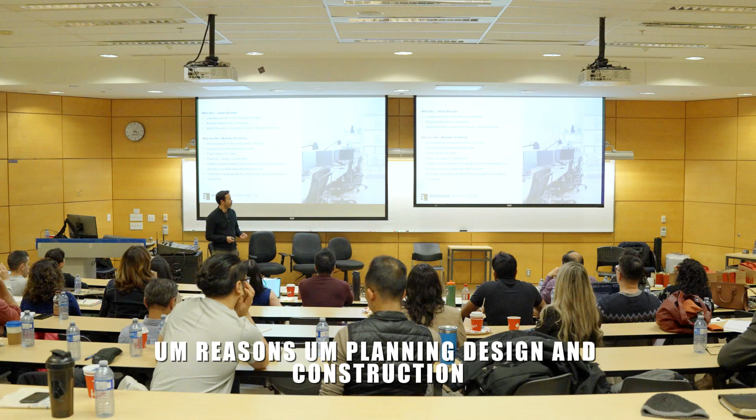A lot of times on these small projects, they aren't at the scale where you're able to hire a planner and all these different consultants. So by getting into these granular scale projects, we have familiarity with the front end, with the planning work, municipal approvals and things like that. Personally, I've had my own construction experience building my own houses, and just familiarity with real conditions on site, which lends well to working with some builders, some of whom are in the room. We can speak the same language.

So that's briefly about us. We're based in Leslieville, just on the east side of Toronto. Contrary to what Andre said, we do all sorts of buildings. So if you want really nice houses or a diversity of building types, we do kind of all sorts to keep it interesting.

I show this - this was an international competition we won last year in the beaches for a winter station, just an art installation. So even though these types of projects are really practical, functional, driven by math and making sense and making money, there's that creative side that I think all architects have, and that really lends well to problem solving in these projects, and it's not something to be overlooked.

This is just a brief history. Where's the clock, by the way? Okay.

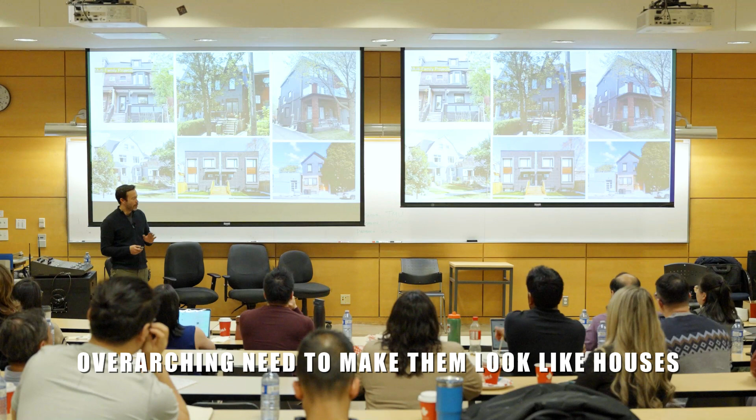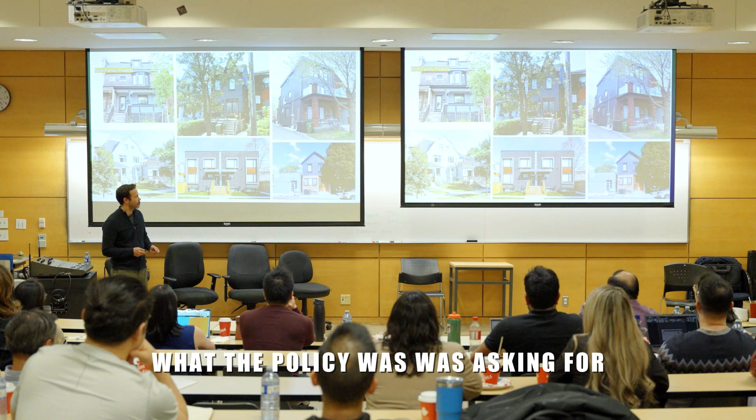Multi-family projects, 10 years ago, there was this overarching need to make them look like houses and really just integrate with what a single family house might look like, or a semi-detached. These are some earlier examples of something that might look like a house in the neighborhood, and that was kind of important to fit the mold in terms of what the policy was asking for. So we made multis that look like that.

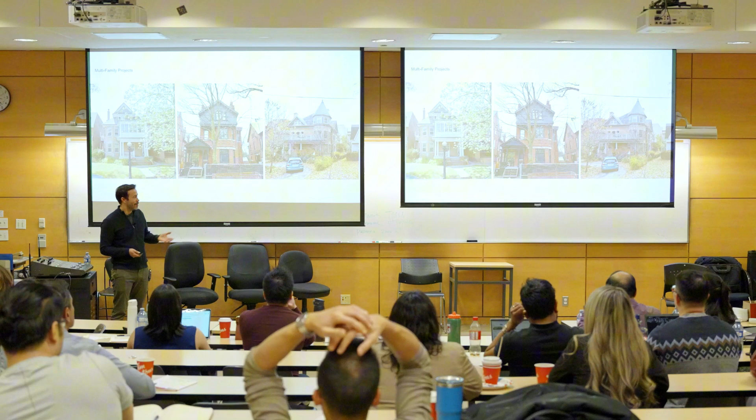These are examples of some bigger properties, luxurious properties - there's nothing to say you couldn't introduce a secondary suite in a property like this and have even part of a basement be an income property, and still have a really nice luxurious home to live in.

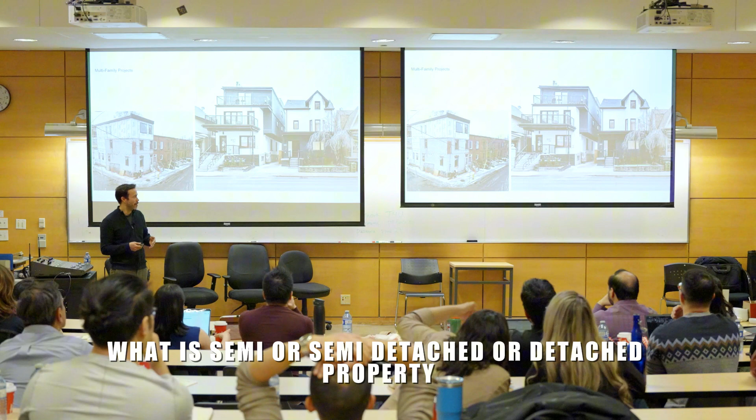And then as we move along, there's just less of a need to fit the mold of what a semi-detached or detached property in terms of a house looks like. So we're starting to see policies change, and just limitations on building height and length and appearance change.

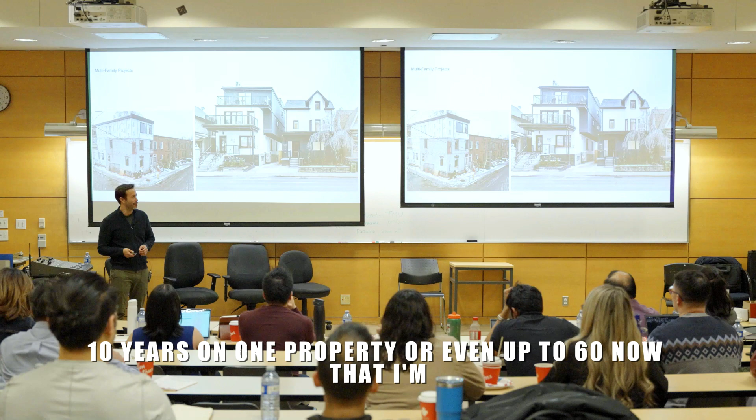So there's just this opportunity now for this new mix of housing typologies in Toronto. Policies are more inclusive of multi-unit. Jaden was saying a term, 'as of right,' in relation to a fourplex, and that is the case kind of across the city of Toronto, and there's even more permissions in certain areas in Toronto for, say, 10 units on one property, or even up to 60 now that I'm sure people are starting to acclimate to.

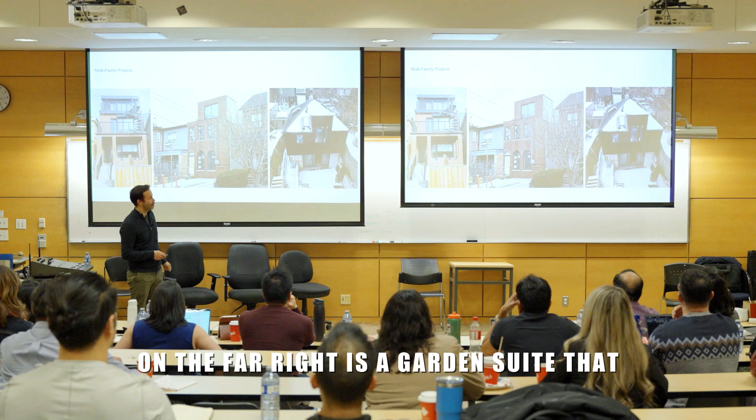And just a few more examples here - on the far right is a garden suite that we're interested to see getting built in the 4+1 model.

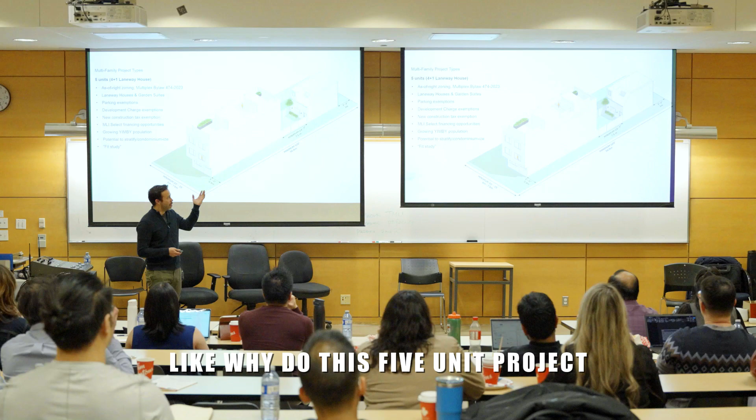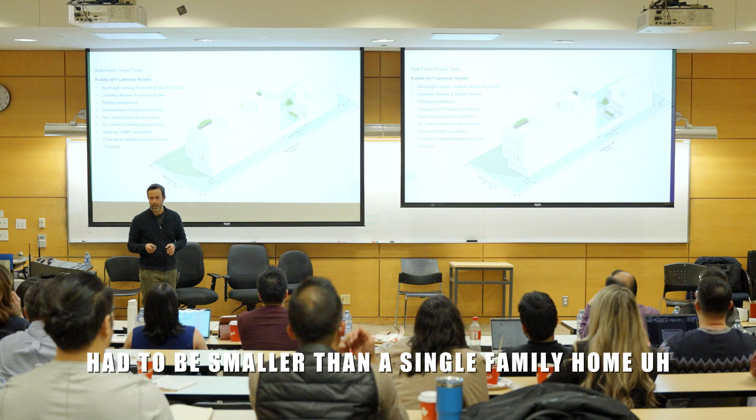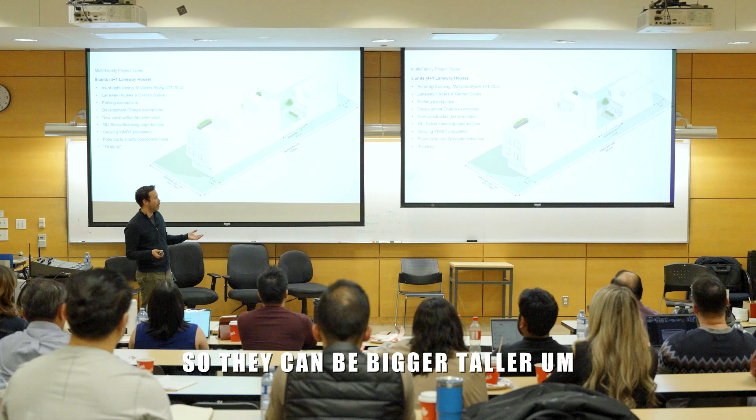So this is a diagram of why now, why do this 5-unit project. A lot of the financing folks earlier have spoken to why it makes sense, but from a design perspective, as of right zoning, in 2023 there was a new bylaw introduced. Previously, even a duplex, triplex, or fourplex had to be smaller than a single family home on a same size lot in an area. This bylaw came out and basically said we're actually encouraging these types of projects now so they can be bigger, taller, increasing flexibility for accommodating smaller units on a smaller lot.

Laneway houses and garden suites, everyone's familiar with. Parking exemptions used to be a sticking point for doing say 4 units on a lot. There was a requirement to have 4 parking spaces on the lot, equivalent to the number of units. Those minimums became maximums now.

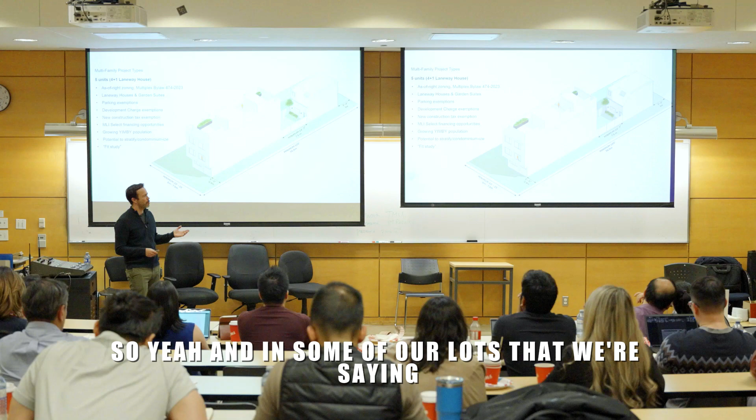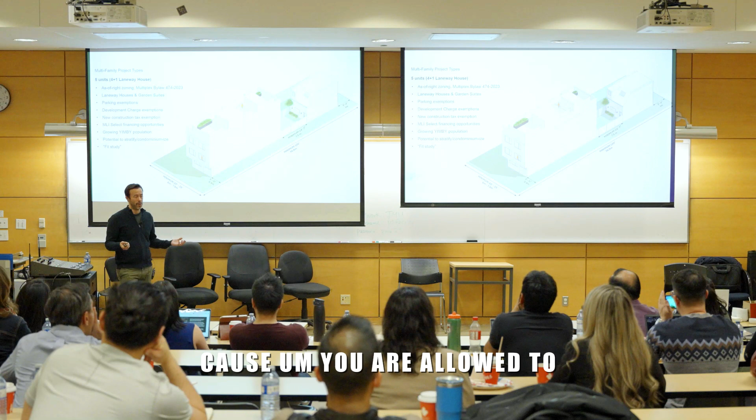Across Toronto now, it's not so much a question of needing to meet requirements, but like Jaden was saying, if you are close to transit and things like that, great. If you're not, it's more a question of whether you, the developer or builder, want to provide parking on the lot. You're allowed to, and in some areas across the city it makes sense to include them. On some of our wider, bigger lots that aren't quite downtown, we're able to fit 3 surface parking spaces at the back of the property to suit the area.

Just a question - what's your experience in being able to get more than 1 parking space on a lot being renovated from a single family home that has 1 space? Have you been able to get more than 1 from the city?

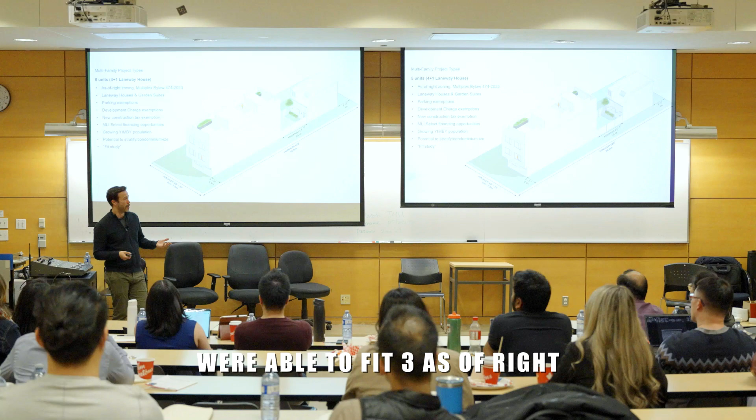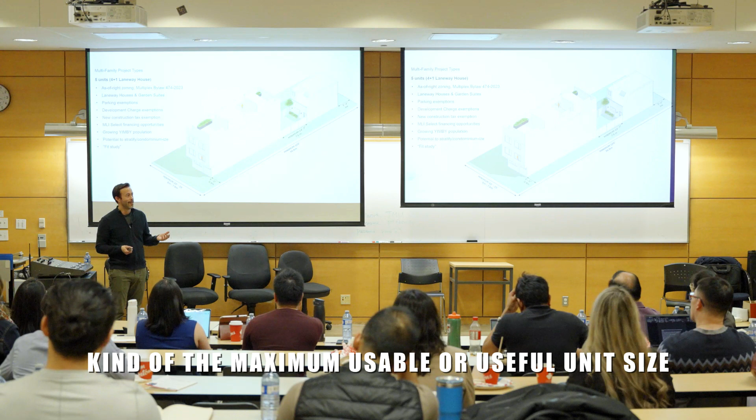In a lot of the downtown locations, we're kind of limited to 1 or 0, though with a minor variance you can get 1. On bigger lots with 50-foot frontages, we're able to fit 3 as of right in a lot of scenarios, and that's helpful. On those bigger lots, the new bylaw makes it so permissive that it's no longer a question of let's build as much as we can - it's let's not overbuild, because the pro forma suggests a 3-bedroom, 2-bathroom unit is about the maximum usable size. An extra den or anything wouldn't yield extra rent, so let's cut construction costs and keep it at the right scale.

I can jump into more questions at the end.

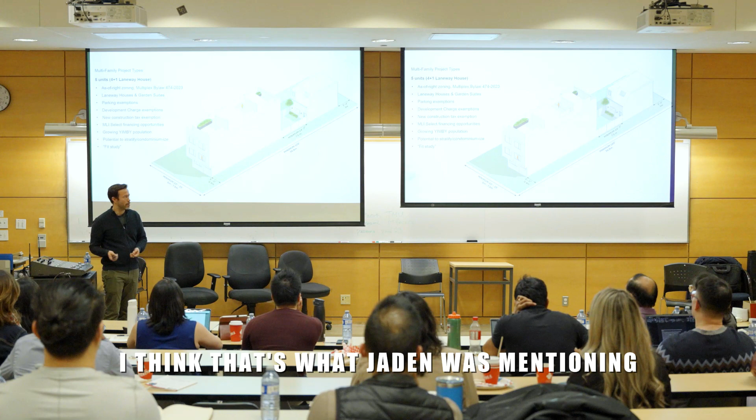Development charge exemptions - up to 4 units on any property is exempt. I think that's what Jaden was mentioning in the previous presentation.

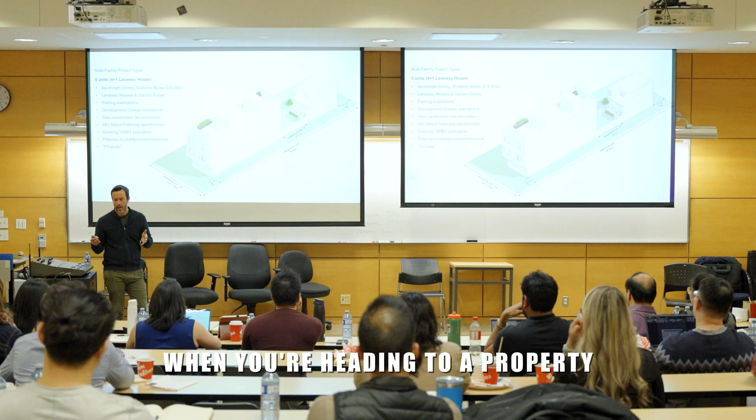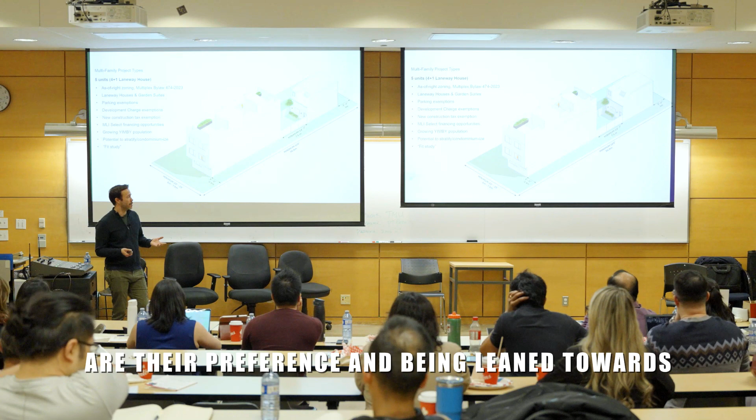It's about $250,000 of development charges exempt for that project type. New construction tax exemption - we used to have to work with existing structures, and there's still some reasons to, for grandfathered setback conditions when adding to a property if you want to keep setbacks. But now new construction for rental is exempt from additional taxes, so we're seeing more new build, high performing buildings being preferred instead of working through construction difficulties with old foundation walls.

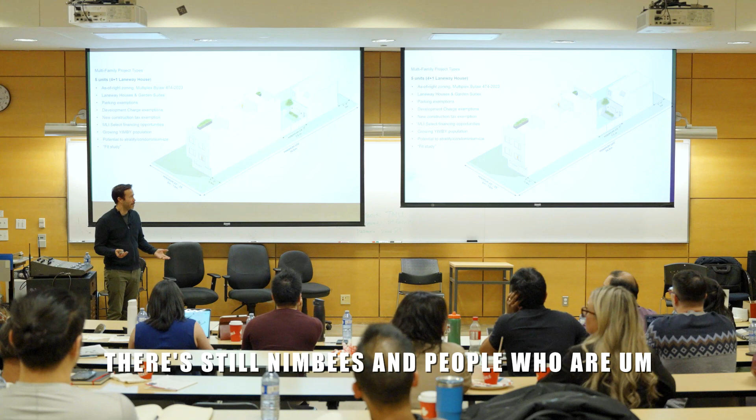Growing YIMBY population - yes, in my backyard, there's still NIMBYs and people against multi-unit properties, but we're seeing a more balanced population now, with people realizing we need more housing, especially with high-rise slowdowns or the lack of a mix of unit types in Toronto.

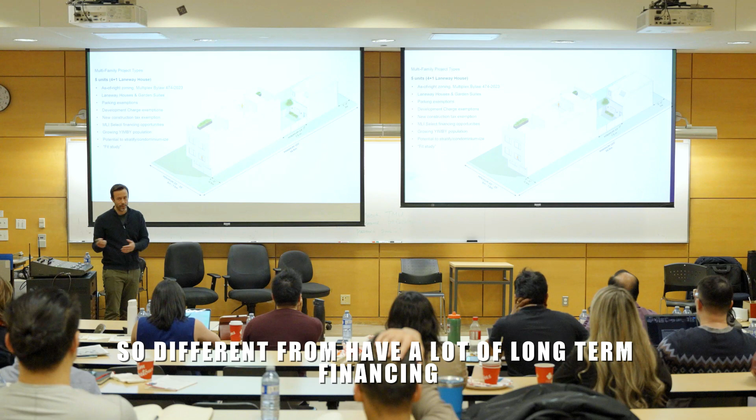Potential to stratify, condominiumize. Some of our projects are going that route - different from MLI long-term financing, they're looking to condominiumize and then sell.

A fit study is something I came up with Andre a while ago. This is when you're looking at a lot and trying to assess it - is it the ideal lot? There's a whole bunch of effort that goes into that in terms of location, but we can be part of it in identifying red flags, whether it be existing conditions of neighboring structures or trees in the area, which adds risk to the project - it's not necessarily a definite you can start building day one, but there are factors to consider.

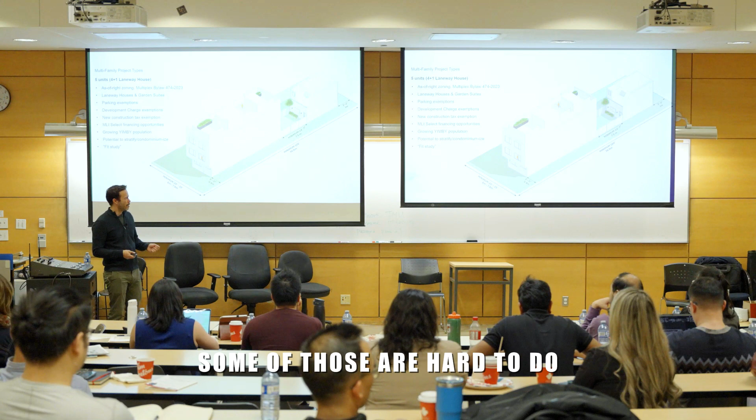Some of those relate to this diagram - we're showing a 0.9 meter side yard setback. Not all units can always enter off the front at the street, so there's a need to access some units from the back of the property, which can include the laneway suite as well.

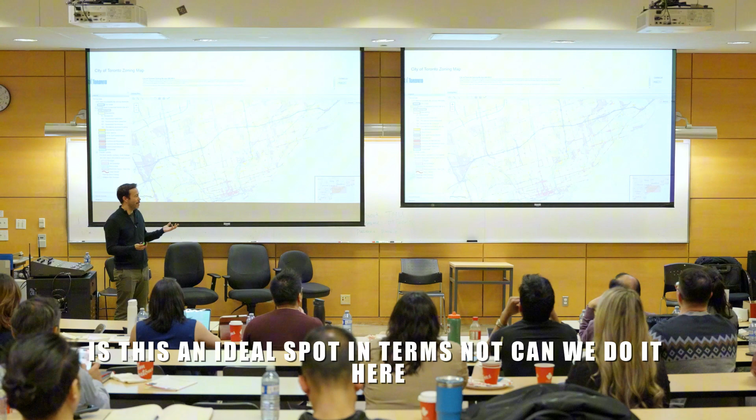This map, if you haven't seen it, is Toronto's zoning map. It's really just opening the door on multiplexes at the 4+1 scale. Everything that's yellow can be a 4+1 in terms of where it's located across the city, so there's a lot of land to cover. It's really that fit study I was mentioning — is this an ideal spot, not just can we do it here.

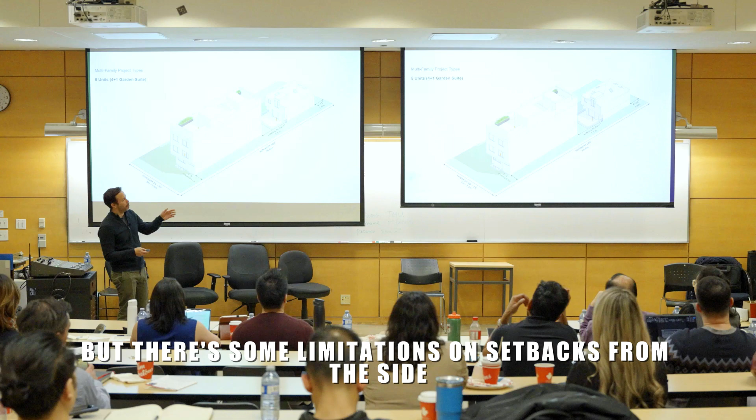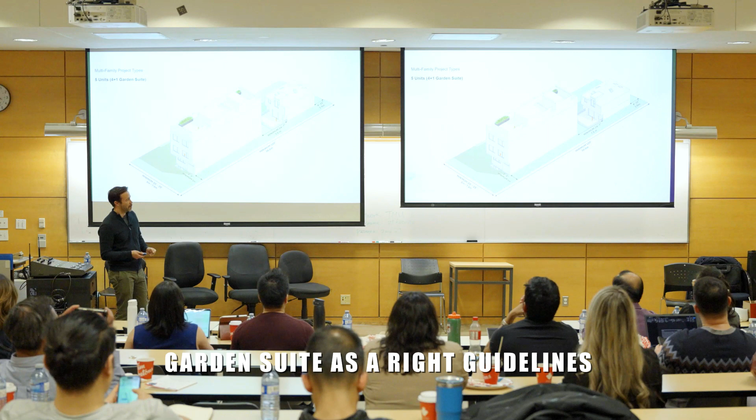This is another slight variation on the 4+1, just a garden suite instead of a laneway suite. The laneway suite fronts on a lane, where a garden suite is just in a backyard, which we're seeing more commonly in Etobicoke, Scarborough, and North York. A lot of Toronto has laneways that allow for a laneway suite, but there are limitations on setbacks from the side, as well as angular planes that are part of the garden suite as-of-right guidelines. As-of-right is good for shortening your construction timeline, but if you want a variance, that would be a way to reduce or remove these guidelines.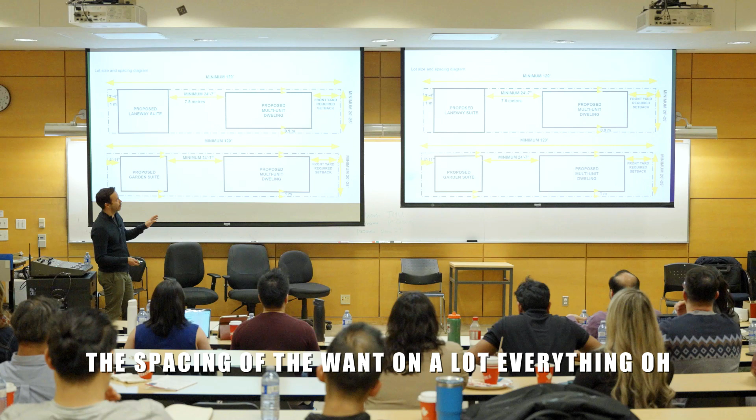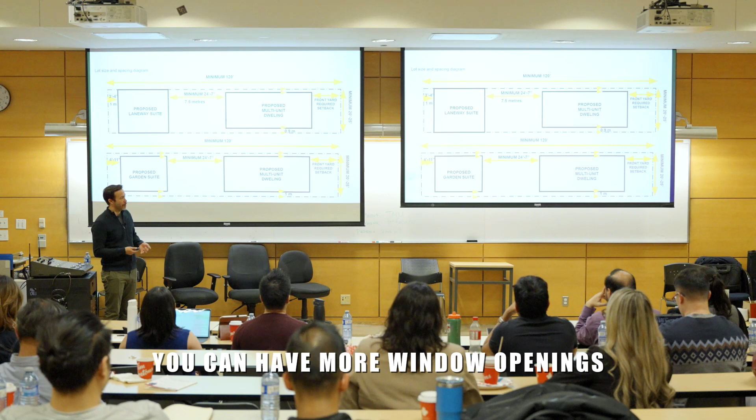These are diagrams I've shown before about the spacing you want on a lot. Everyone asks, is this a good lot, is that a good lot? Roughly 20 to 25 feet of frontage is kind of your space minimum. There are benefits to wider lots — increased setbacks, wider buildings, more window openings — but if you're trying to do more with less, this is where the project starts to make sense.

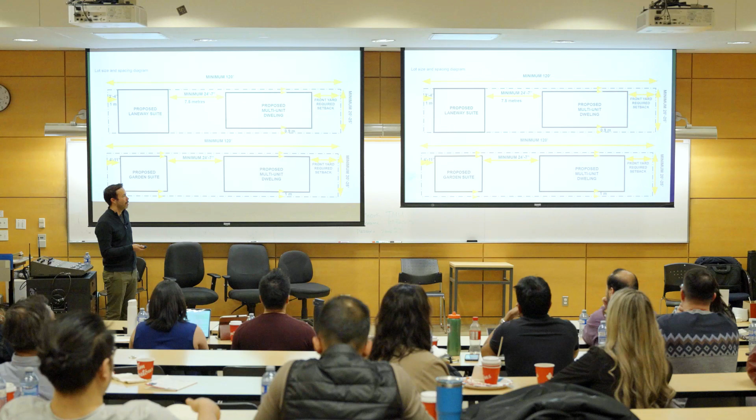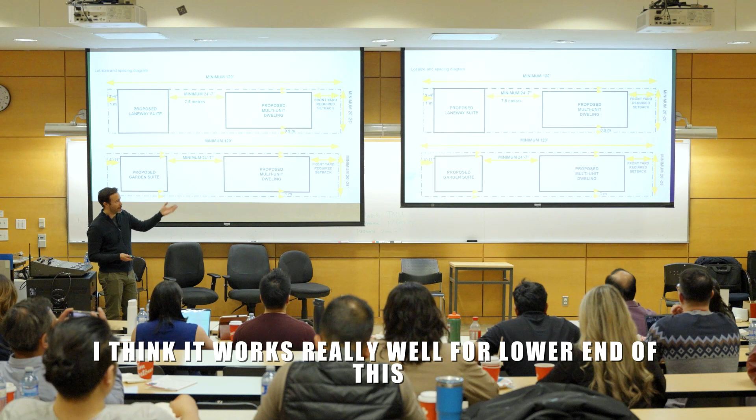In the residential zone there are different variations: R, RD, RS, RM. The R zone is the most flexible in terms of reduced setbacks, so it works really well at the lower end of the scale, around a 20-foot wide frontage. In some other zones, side setbacks are 1.2 meters, so you already have less building, meaning you might want to start at a 25-foot lot.

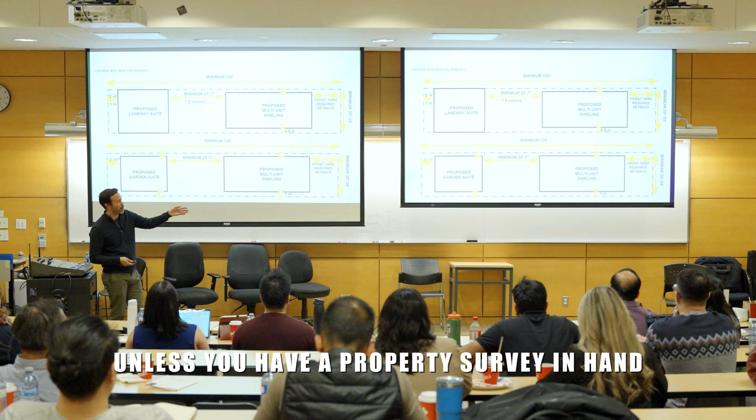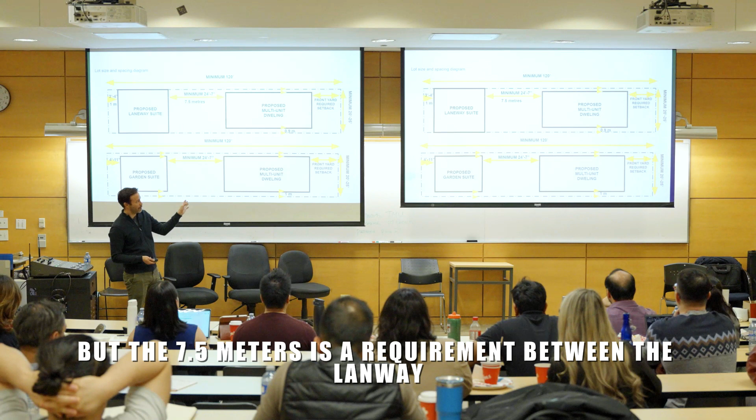The depth can be variable depending on where your front yard setback is in relation to the invisible lot line, unless you have a property survey in hand. Sometimes if the neighbors are set back less, you can also set back less. But 7.5 meters is the requirement between the laneway suite or garden suite and the main building, so everything scales off of that.

This is an article from the Toronto Star last month. One of our projects was mentioned, and the owner at the time declined to comment because they didn't want to draw attention to it. I'll announce it here because it's since been approved as a condominium, so they're not as concerned anymore about any negative attention.

Just an alternate strategy if a long-term hold rather than a sell is the idea — these seem to be really attractive in some of the areas served by transit.

To your comment earlier about a vehicle, this project of ours actually has a shared vehicle between the 4 residences, so it's kind of an asset to be able to provide it as a condo shared element.

We're doing some of these in really nice areas that people want to live in. If it wasn't an as-of-right condition, you could imagine the backlash — we've seen widespread opposition to fourplexes in some recent committee of adjustment applications. But if we can fit them as-of-right, it goes straight to building permit, which is a nice way to circumvent that.

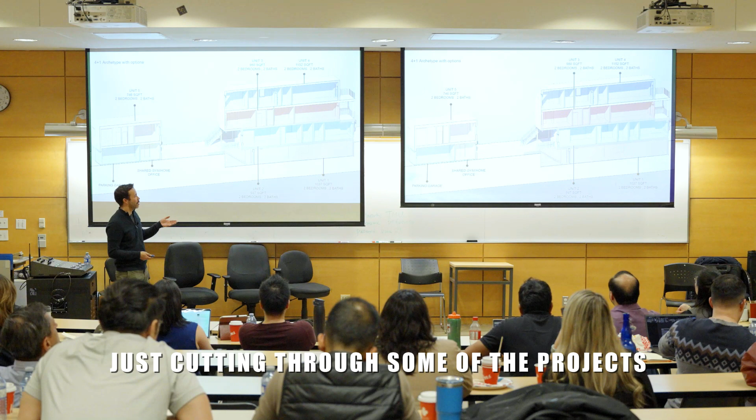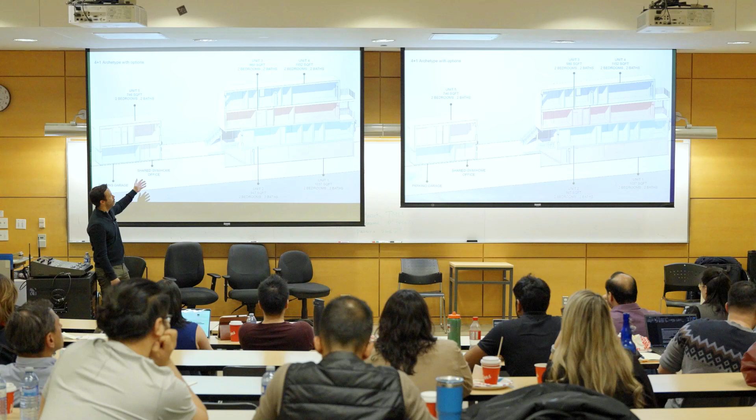Just cutting through some of the projects in terms of what they look like on the inside. This is the most conventional model — a basement and 3 stories, dividing the units up one per floor, separating them with fire separations and sound separations between the floors, plus the ancillary building.

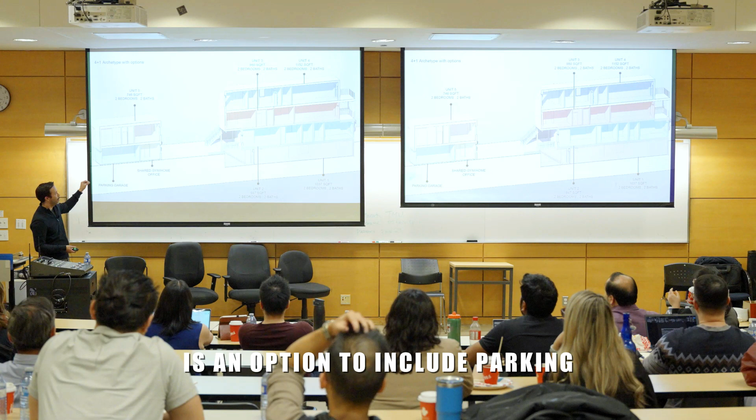There are different items to play with here. It could be an entire single-family detached laneway suite or garden suite, and there's an option to include parking. On one of our projects, we did a parking stacker that fit 2 cars — you'd bring one below grade and stack them on top of each other. There's also an option for shared elements; in this one, there was a gym and home office space as part of the garden suite.

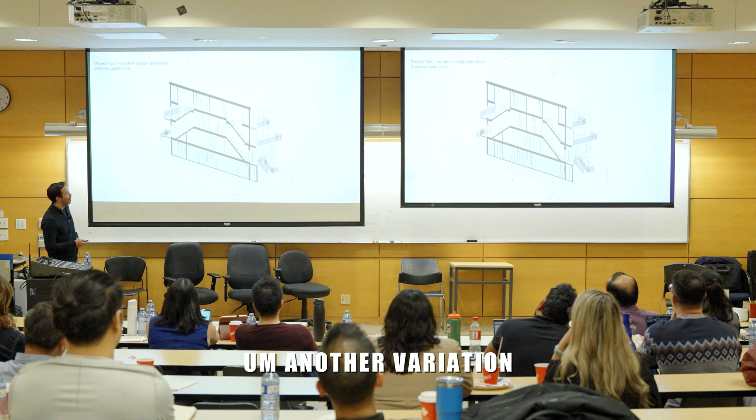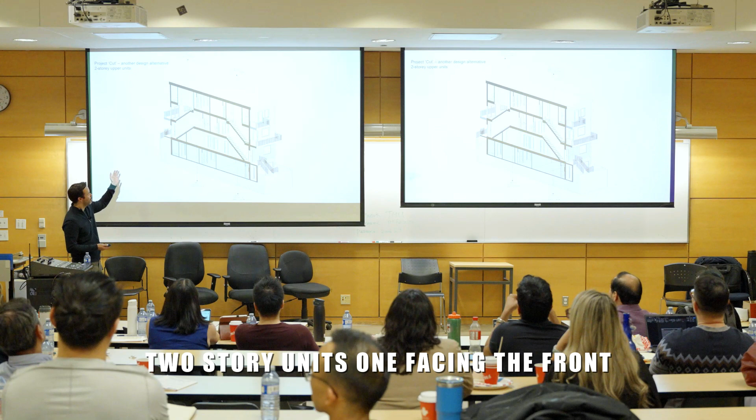Another variation — I think I've shown these before — just to give an idea of the flexibility and play possible with these types of buildings: 2-story units, one facing the front, one facing the back on the upper 2 levels, with more conventional single-story units on the ground floor and basement. In some of our wider lots in Etobicoke, these 2-story units are making a lot of sense, and we can even imagine them side by side, 2-story units stacked one on top of each other.

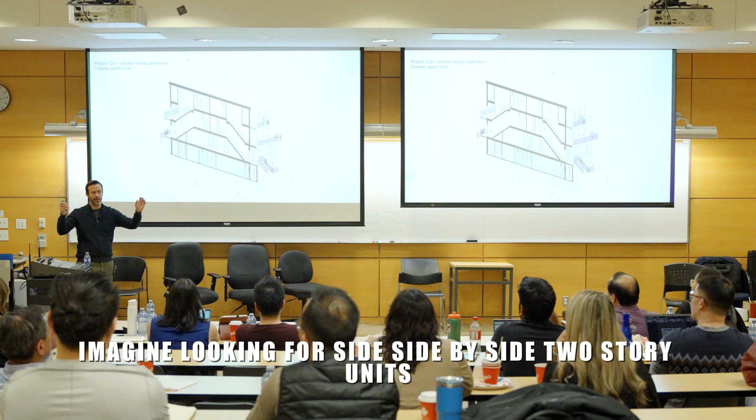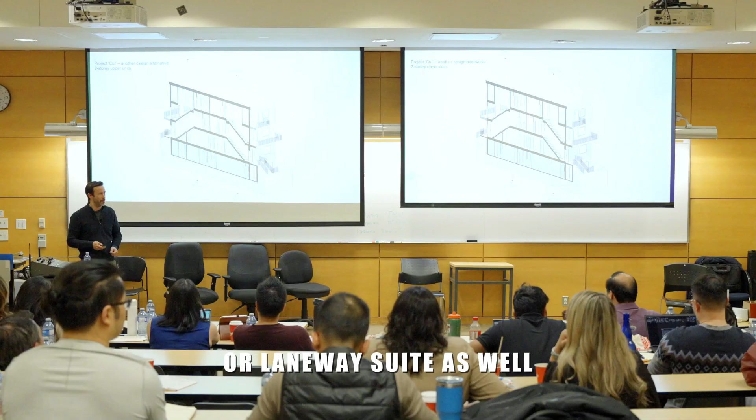So more resembling a stacked townhouse, stacked detached townhouse. 2nd and 3rd story left, 2nd and 3rd story right, ground and basement left, ground and basement right. So everyone has access to the front of the building, the back of the building, and you could even fit a garden suite or laneway suite as well to get to that 5-unit configuration.

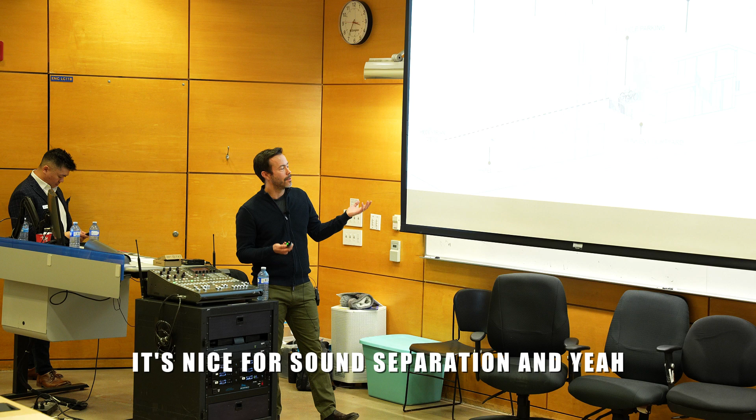This one's more set up like a townhouse, so there's not really any units above or below. It's nice for sound separation, and just the different types of spaces you can have in a building, whether it's a primary bedroom floor, kid bedroom floor, living room floor, and then a basement rec room. We just like to play in different ways with these types of buildings.

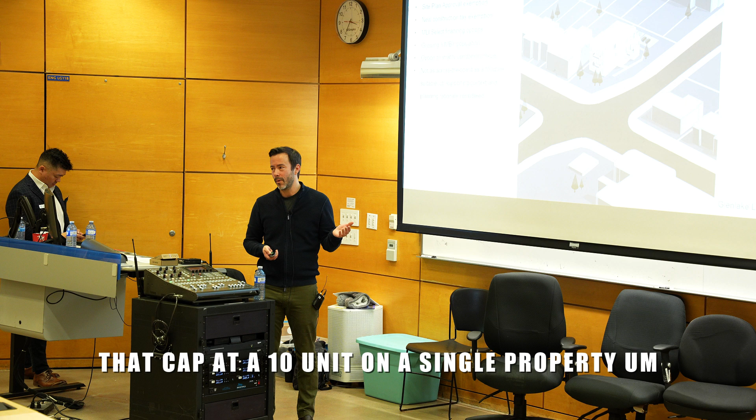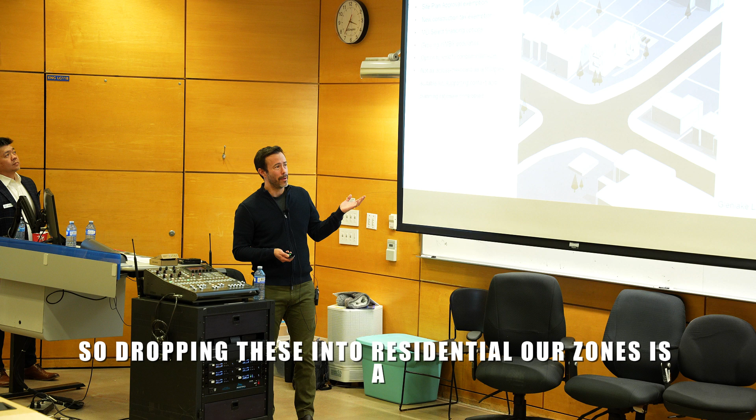Now this is just jumping to a second scale that I think makes a lot of sense, and we have some projects underway now, some under construction, that cap at 10 units on a single property. So the draw to these now is that recently Toronto has exempted these projects from site plan approval, which was a lengthy and costly front-end process that is no longer applicable. So dropping these into residential R zones is an opportunity that's there.

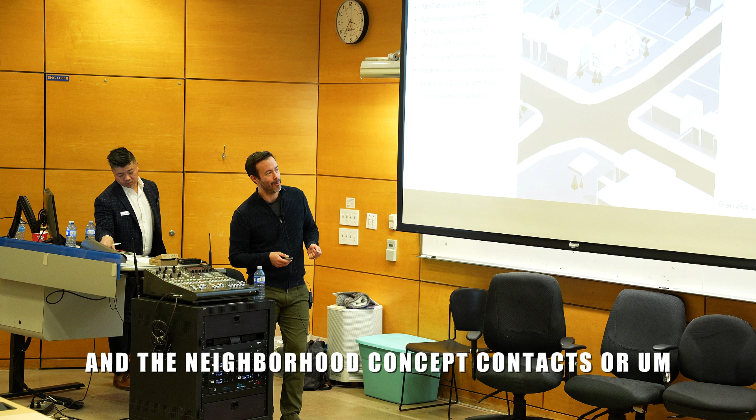Likely still needs a minor variance application, but with the right justification based on location, proximity to transit, and the neighborhood context, it's something that is a viable option. Same opportunity to stratify or condominiumize as an option, but an interesting one.

This is the exploded axonometric view. We just showed the different unit types that can all fit in - in the previous slide it looks pretty low-rise, integrated, but on the inside there's 10 units going on, 10 families, to suit the different kinds of family makeups that we have in our city.

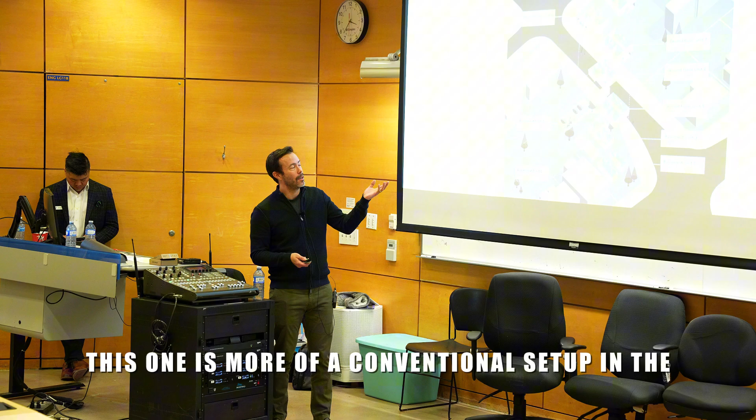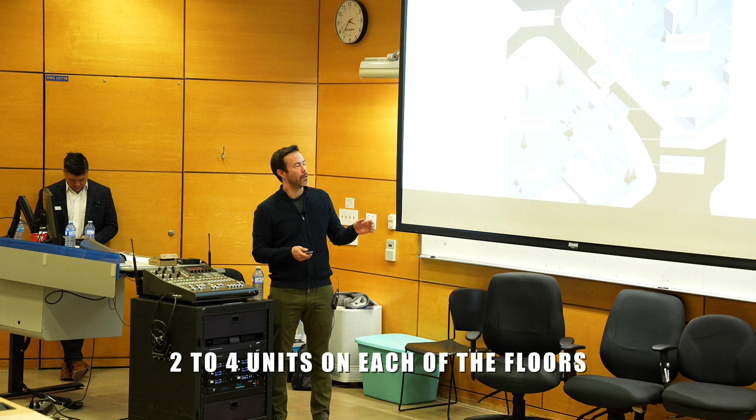This one is more of a conventional setup in that there's a lobby and 2 exit stairs, with access to all the floors, and 2 to 4 units on each of the floors depending on the floor. There's another version of a 10-plex that can just be walk-up townhouses, which is a nice one as well. There's 0 unleasable floor area relatively speaking, so each of the units can just enter directly into the unit, and it's just a bit more efficient from a floor area perspective.

Then jumping to a third scale, this is on major streets with a bylaw that was just passed last year. Site plan approval, contrary to the previous example of 10 units, is still applicable, but the scale of building you're allowed to build now on major streets is up to 6 stories and up to 60 units. That's as an apartment building style, or up to 4 stories as a townhouse.

For this type of project, we're finding as we're laying them out, you do want larger than 50-foot lots if you're really trying to get to that upper echelon of number of units, but there's nothing to say that you can't reduce the units and do it on a smaller lot frontage.

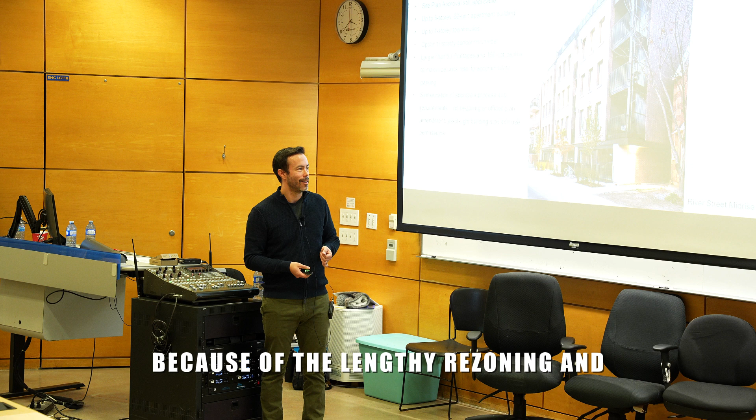This was actually a project we did a number of years ago, but I think back to it because of the lengthy rezoning and front-end process that was attached to this project. Under the new model, it could now be something that happens a lot faster and makes a lot more sense, even if it did make sense 5 years ago.

Adam, I have a quick question. The business model that was used for the 6-story apartment building there - DCs being a major factor, right, when you're doing one of these - was the business model based around a rental business model, or was it like a condominium?

That one was a purpose-built rental. It was one of the earlier ones that we've seen in Toronto, and purpose-built rental is now a more familiar term, but that one was purpose-built rental. It did have development charges applied to each of the units, just a more conventional development. Kind of a missing middle, early days project that now makes more sense with the newer policies.

This map, contrary to the one that was just coded in yellow, it's only these gold-colored bands along the major streets that are the zones identified for these 60-unit projects on major streets. It still covers a ton of ground. Again, there's no parking minimums.

It's just maximums, but there's some of the projects we're working on that are not quite close to the core, not quite close to transit, that we're trying to add parking into just to make the building make sense. There's one out in Scarborough that we're looking at a 25% parking ratio - so 45 units and about 11 or 12 parking spaces, just as the right amount to suit the tenants that are going to be moving in there.

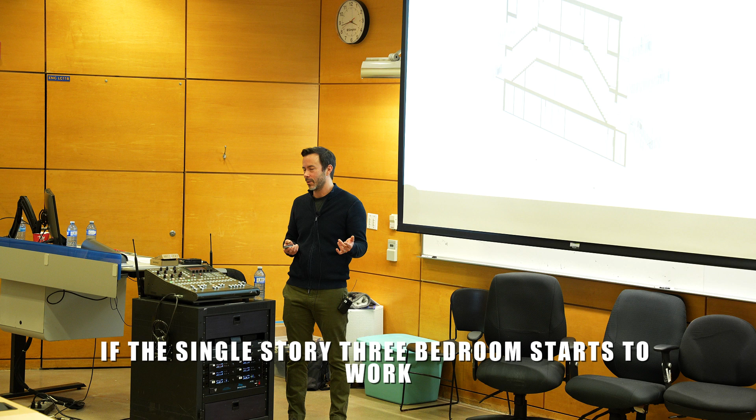But I think we've had projects go both ways, just because from a tenant perspective it might seem undesirable to have to go up 2 flights of stairs to enter your unit on the top floor. It might be desirable to occupy the top floor, versus the back-to-back model, which is reflected here in the almost red and yellow. But just entering onto the living space floor one story up seems really ideal, more like a conventional 2-story house with a living room floor and a bedroom floor. But I think what maybe turns it is if you can get a 2-bedroom or 3-bedroom working as a single story, maybe that's the turning point in terms of what performs better.

I'd just add on to that, because we bring a perspective from the tenant side. I think viability is the biggest one, right? Like Adam said, you're mostly constrained by the layout of what you're working with. If all things are equal, a design where you don't have to stack tenants on top of each other is preferred, both from a construction point of view, because the fireproofing you're doing between levels is a bit different, and from a noise management point of view. If somebody's jumping up and down, you're just jumping over your own unit, not disturbing tenants underneath, so there's less noise management as well.

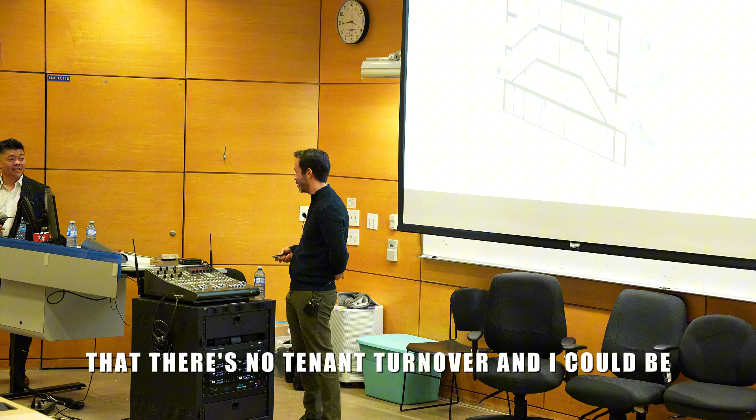But all things being equal is not often the case. Maybe the counterpoint would be that tenants are so happy there's no tenant turnover, and that could be undesirable over the long term. Exactly. Another question for Adam?

Yeah, this was in an R zone, so one of the most permissive for setbacks, but on a 25-foot lot. Yeah, 25 by, I think it was 120. So in this model, it's the living room floor that's the smallest, but then you have a kid's bedroom floor and a primary bedroom floor and a basement to offset the smaller living room floor.

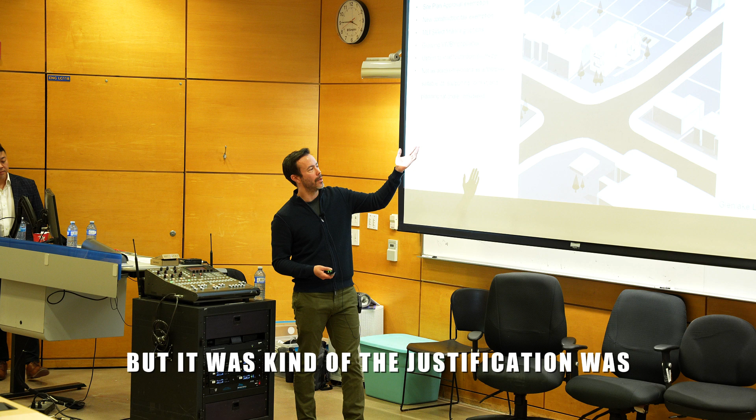What's the lot size for your 10 unit? Yeah, that one wasn't in a regular lot, it was a corner lot. They weren't called major streets by the new major street policy at the time, but the justification was that it was on the periphery of a neighborhood that ended here, on Glen Lake, just 148 Glen Lake. But it wasn't much bigger than a 25-foot lot. It was more about the existing building that was there, which was a bungalow at the time.

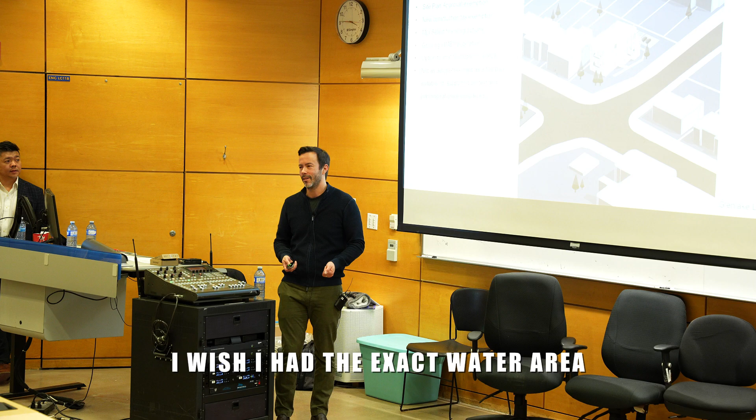This one was a little weird because of the topography, so it was on a sloping site that was a little harder to deal with from a construction perspective, but I wish I had the exact lot area. One more question?

For the 4+1 conversions you talked about, either gardens or laneway suites, are there still minimum requirements for green space on those lots? Even with the change in the policy that allows for additional units? I imagine there has to be some sort of action that doesn't require green space, right?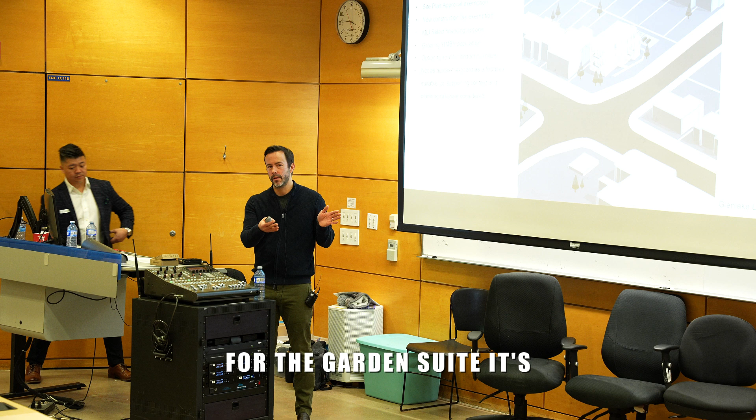They have laneway-specific and garden-suite-specific landscaping requirements. For the garden suite, it's the entire rear yard - the garden suite can be 40% of the entire rear yard area, and 50% of the entire rear area has to be soft landscaping. Whereas for the laneway suite, it just delineates the area between the laneway suite and the main house to be heavily landscaped, and it's about 85% that they're asking for there.

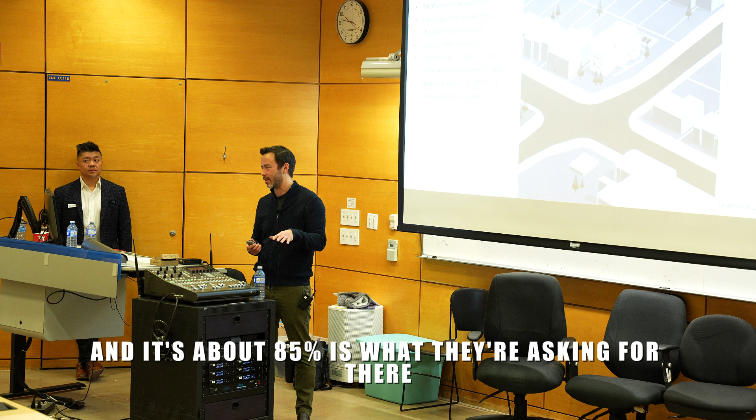Really recently, maybe six weeks ago, the province came out with reductions in the distance required between main houses and laneway suites and garden suites. Still, no one really knows why, but they limited those to up to 3 units on a lot. So all these 4+1 projects are still stuck with the 7.5 meter distance between the two.

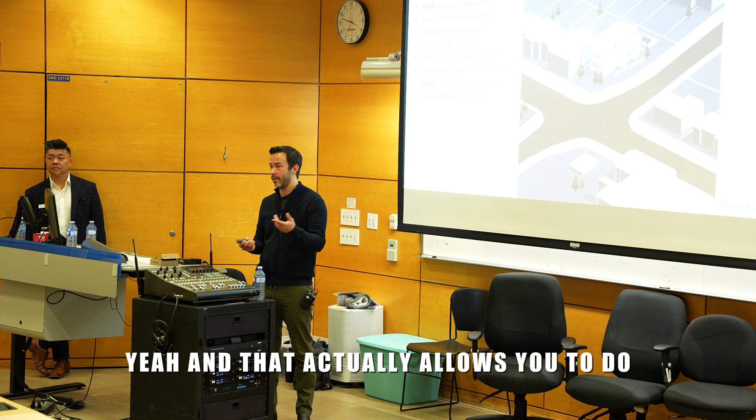With less space, you can still do additional units if you have fewer total units. That actually allows you to do straight wall garden suites, whereas all the other projects are still stuck with the angular plane requirement.

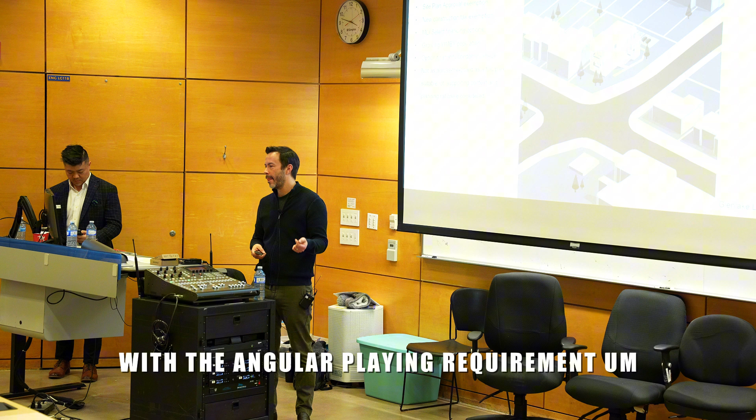We heard from a liaison between the city and the province that they're revisiting that because it doesn't make sense, but they've identified Q2 as a time when they're going to give us some new feedback, maybe.

Sure, what was it? Your question? Oh yeah, did you want to actually address that question from the speaker?

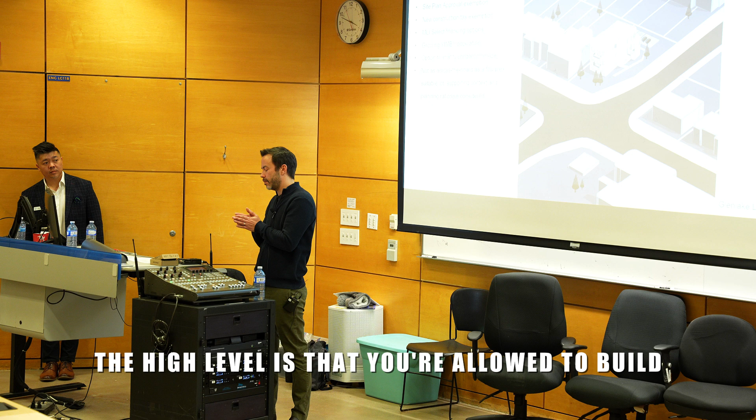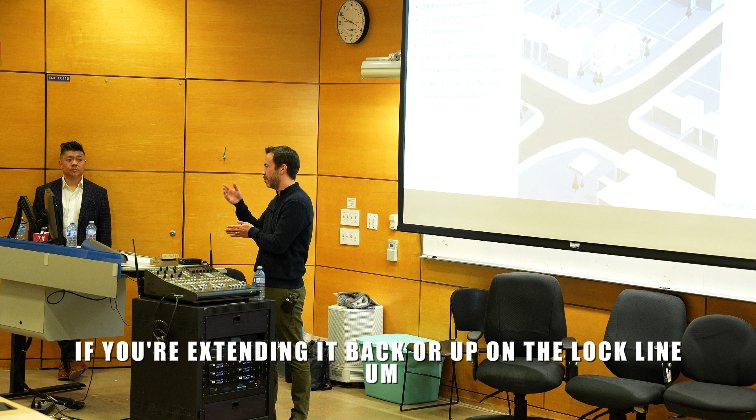Even in my experience, where we've worked on a ton of townhouses, semi-detached row houses, and even in commercial zones - the high level is that you're allowed to build up to your lot line, and maybe this isn't blanket across all the zones, but I'm thinking about residential zones with a 0 setback where you have a party wall. There's an opportunity to straddle your party wall if you're extending it back or up on the lot line, if you're increasing it, with a party wall agreement.

On the bottom side, in the basement level, you need the party wall agreement to excavate and dig down. This is getting into a different topic, but basically building the lowered basement height for both sides, at least on that shared wall - the party wall agreement has to be in place for that.

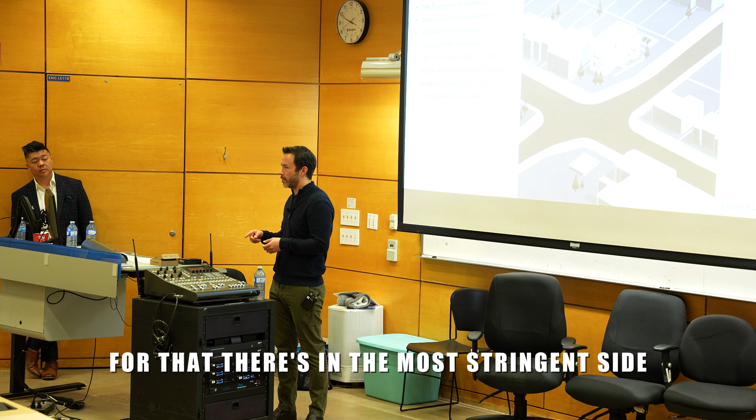On the most stringent side, some examiners - and again this is some examiners' comment - it's not about the physical wall, it's about the loading of the wall. So they want the structure to be fully on the subject property, not on the shared wall. It could be a load-bearing wall, so that might be the nuance that's driving you crazy.

Yeah, no, I guess in my opinion - I'm not an engineer - but the creation or the addition of the party wall or the footing is an engineering question. It's an engineering issue.

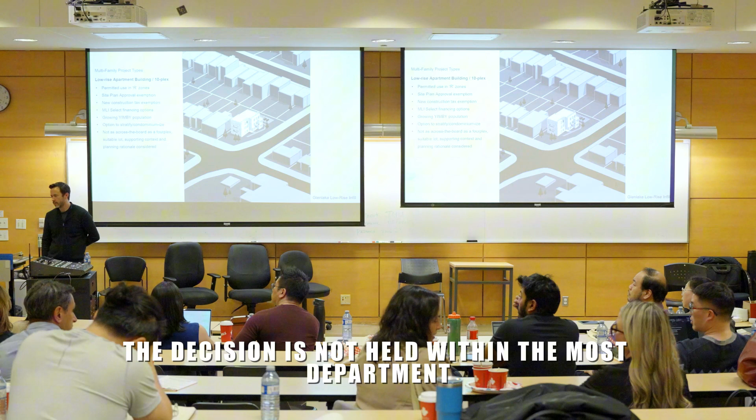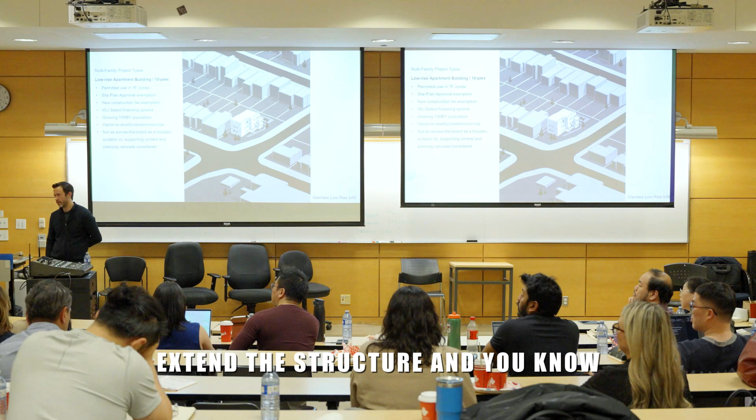And so I was upset to find out that it's not - the decision is not held within the building department. I have to get permission from my cantankerous neighbor to extend a structure, and I just think that really doesn't make sense.

For sure. So I was hoping there might be some legal mechanism to address that. It would just be building up to the property line, not over the property line - that's kind of within your right. I agree.

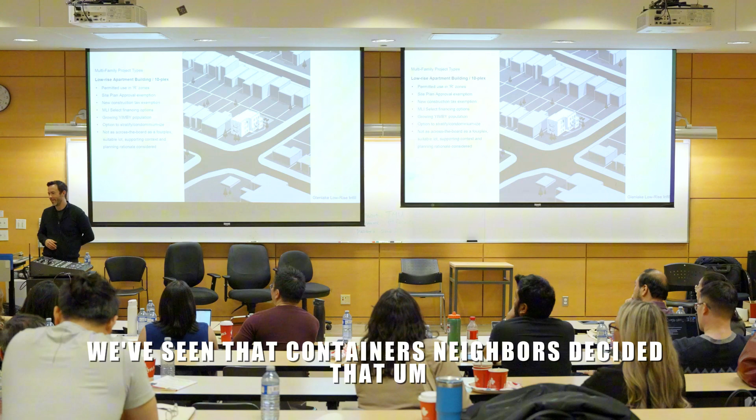In most cases though, we've seen that cantankerous neighbors decide that when we're working with underpinning companies, most people want the underpinning to be done because of the net improvement to their property, and the construction noise is going to be there one way or another. So it seems like something that makes sense to do.

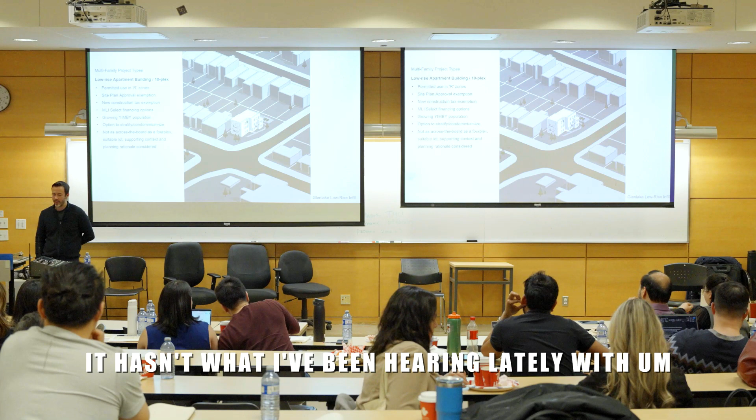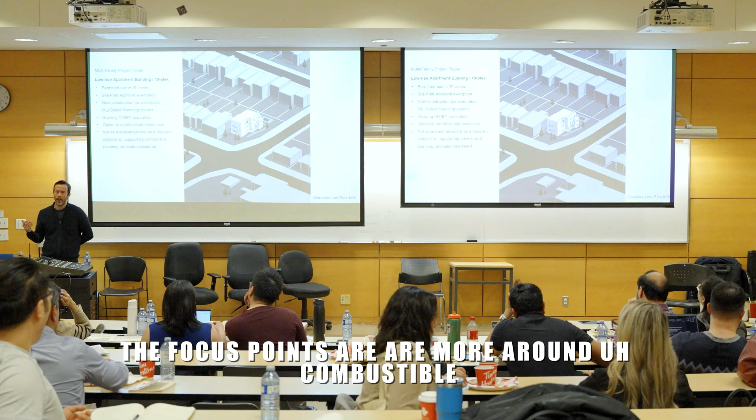Is there any possibility that the city might change policy there? I don't know. Is there any discussion about that? What I've been hearing lately, someone was talking about all the changes going on - the focus points are more around combustible versus non-combustible construction and things becoming more common with these 4+1s. I haven't seen the party wall agreement topic at the top of it.

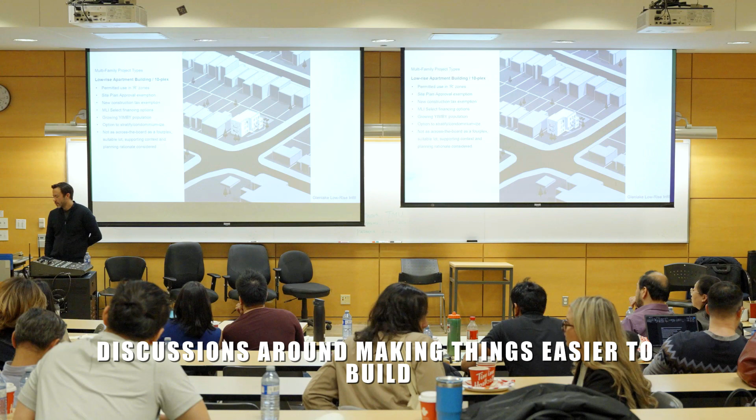I think policy right now leans more towards density - there's a lot of discussion around making things easier to build, like the removal of angular planes and stuff like that. But I haven't heard any whisperings around party wall stuff either.